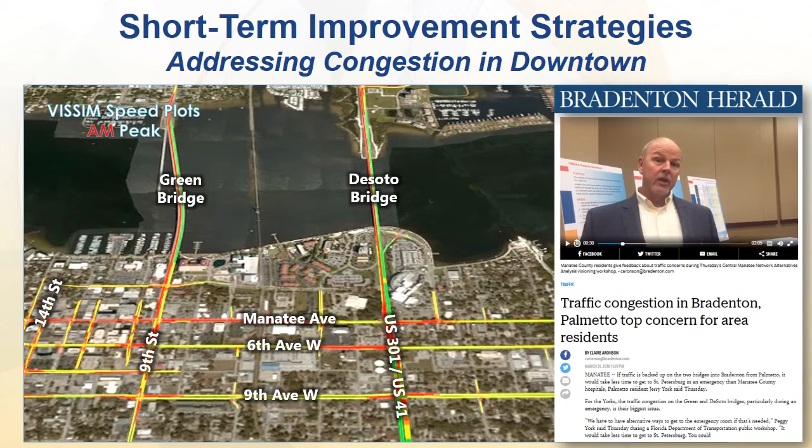This is a concept that significantly improves traffic flow during the busiest times of the day. It involves changes to traffic signal operations, restriping of existing pavement, and a few other minor modifications that fit within the existing roadway footprint.

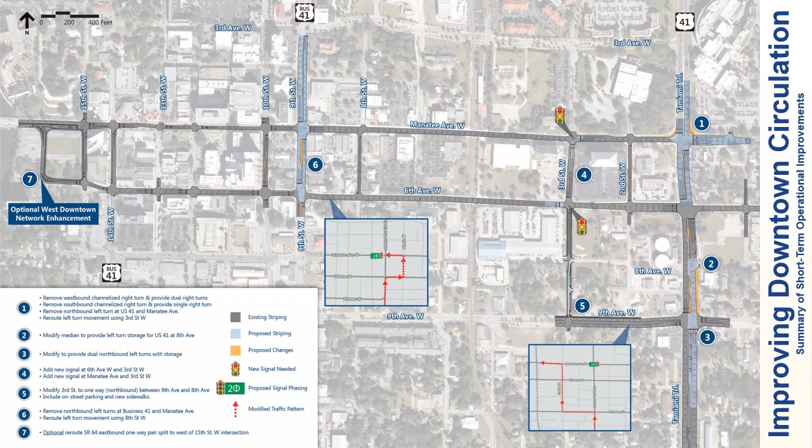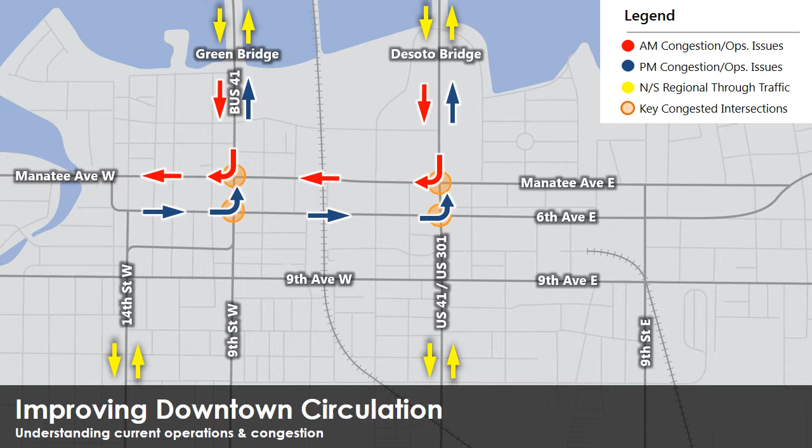The focus is on prioritizing key travel patterns during the morning and afternoon rush hours and looking for opportunities to provide relief at the most congested intersections.

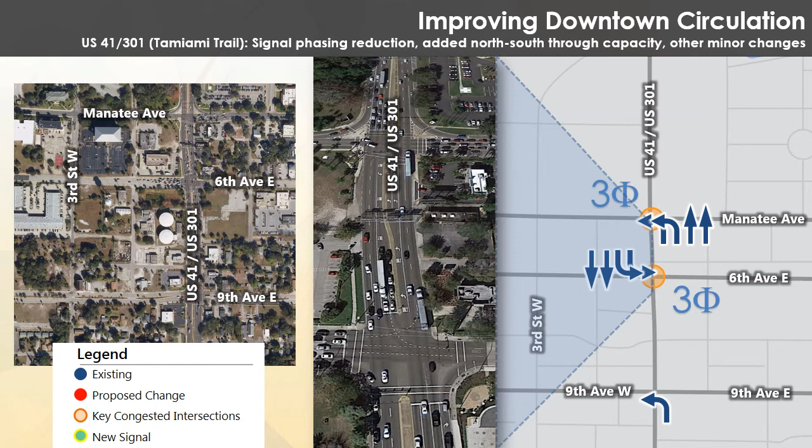Along First Street, which carries the heaviest volume of traffic, the intersections with Manatee Avenue and 6th Avenue provide an opportunity to increase the flow of through traffic. This is done by restriping the existing left turn lanes to create one additional through lane in each direction.

Northbound left turns from First Street onto Manatee Avenue are relocated to 9th Avenue, where they will use 3rd Street to proceed north to Manatee Avenue. These changes allow the traffic signals to serve many more vehicles within the same space the roadways occupy today.

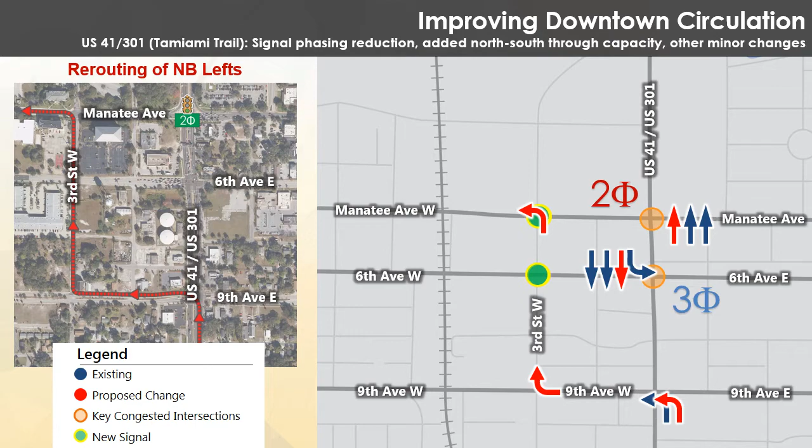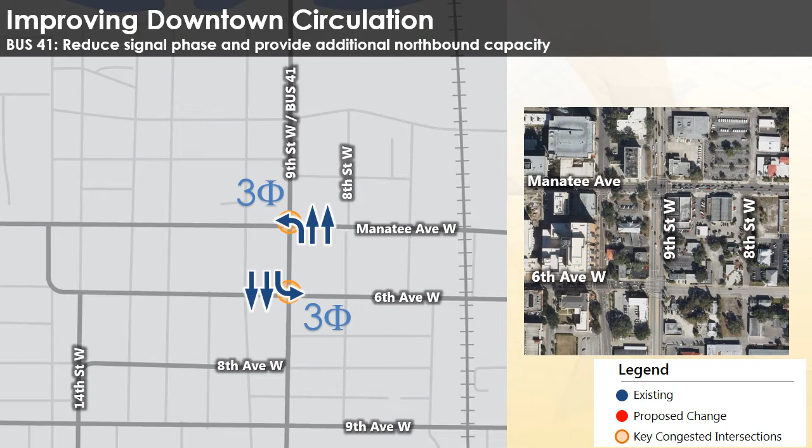A similar treatment is recommended for 9th Street. So the traffic signals can work more efficiently, the northbound left onto Manatee Avenue is shifted one block east to 8th Street. This provides 9th Street more green time to accommodate the heavy left turn traffic from 6th Avenue that currently backs up between Manatee and 6th.

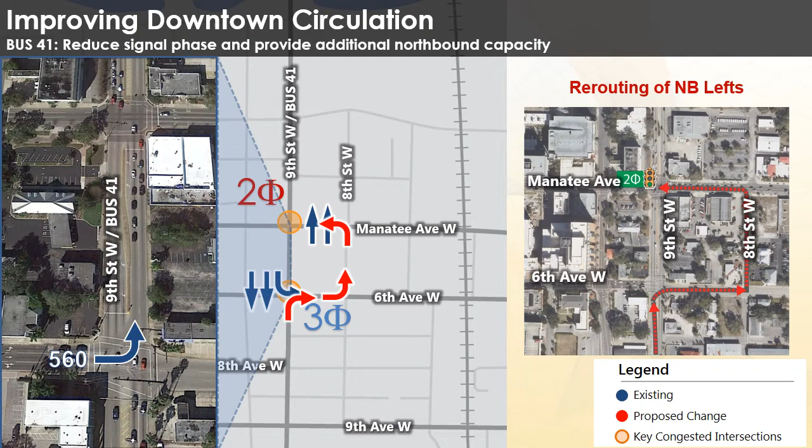A robust transportation network provides safe accommodations for all users, pedestrians, cyclists, drivers, and transit riders. Sometimes users are in shared space, and sometimes they need to be separated for safety, depending on how many cars are on the road and how fast they are moving.

A complete streets approach to network planning involves understanding the purpose of the street and addressing the abutting land uses. Elements incorporated into the cross-section influence the character of the facility, which in turn influences how people behave on the street. Identifying opportunities to enhance the network to better support people traveling through the community safely, conveniently, and comfortably is central to the development of a successful plan.

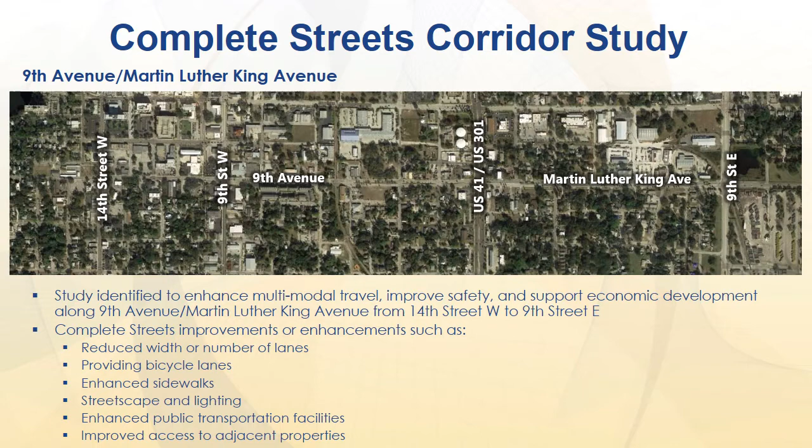An example of a complete streets project recommendation is the 9th Avenue, or Martin Luther King Avenue, Complete Streets Corridor Study. The purpose of the study is to identify complete streets improvements or enhancements that can be implemented along 9th Avenue, Martin Luther King Avenue, between 14th Street West and 9th Street East, such as reduced width or number of travel lanes, providing bicycle lanes, enhanced sidewalks, streetscape and lighting, enhanced public transportation facilities, and improved access to adjacent properties.

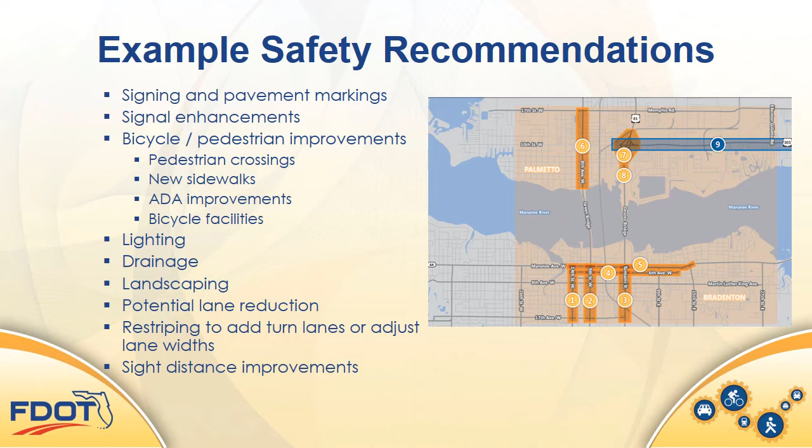Planning for safety is paramount. CMNAA has conducted roadway safety audits for 9 corridors that have identified safety countermeasures to reduce crashes. These improvements include traffic signal modifications, lighting, sidewalks, and bicycle enhancements, among others.

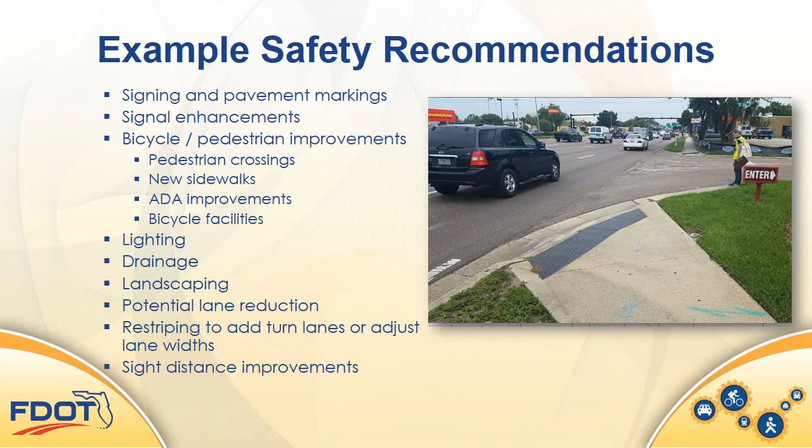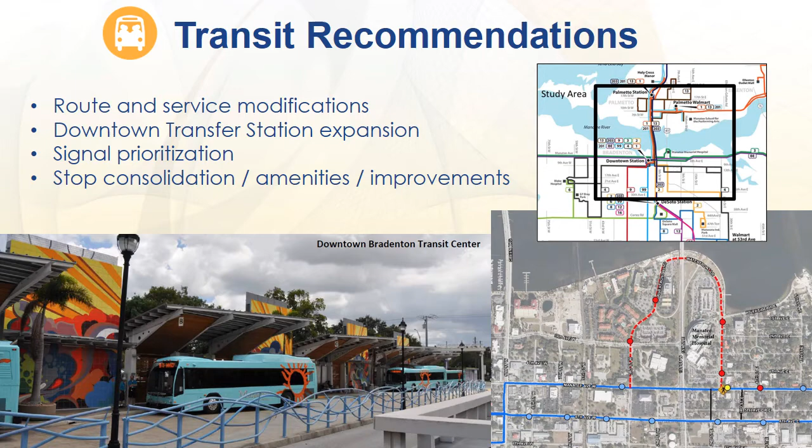Transit is another mode considered by the study. The quality of transit service is measured in frequency and reliability. Potential improvement strategies include route and service modifications, downtown transfer station expansion alternatives, signal prioritization, and bus stop improvements.

Our assessment of the pedestrian and bicycle network focuses on continuity between facilities that consider the volume and speed of traffic. Recommendations to improve pedestrian access include closing sidewalk gaps and providing more marked crossings.

For cyclists, the assessment looks at the mix of bicycle and vehicular traffic. Recommendations include buffered bike lanes where space allows, bike boulevards away from heavy traffic on alternate routes, and specially marked lanes on neighborhood streets or constrained corridors where bikes and cars share the roadway.

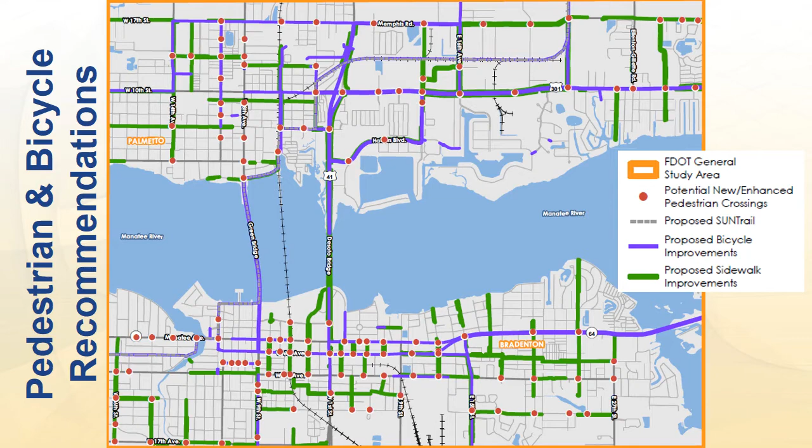As part of the Governor's initiative to develop a statewide system of interconnected recreational trails, the Florida Shared Use Non-Motorized Trail Network was established in 2014. The SUNTrail program provides state funding to develop new trail alignments, leveraging a series of existing trail networks throughout Florida.

Within the CMNAA study area, the Willow to Ellenton Greenway Trail is planned along the route shown here. This facility will provide regional connectivity between the Tampa Bay region and points south along Florida's west coast.

The CMNAA study has also identified an opportunity to enhance trails connectivity within the city of Palmetto. FDOT is partnering with the city and other local agencies to provide additional trail connections between Lincoln Community Park and the new Lincoln Memorial Academy Charter School.

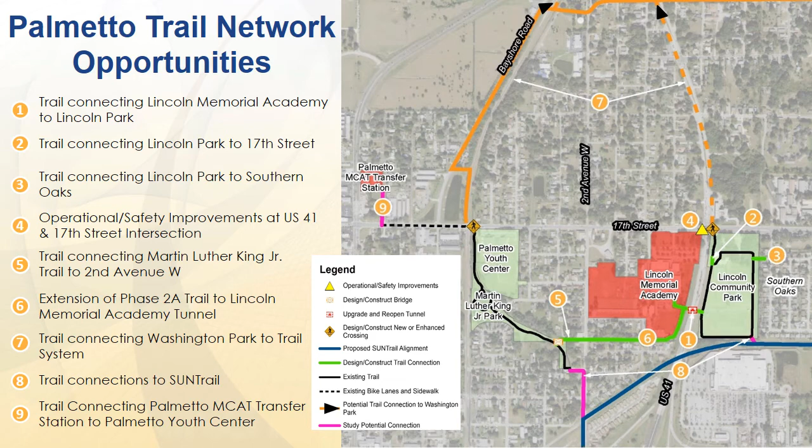This will tie into the planned SUNTrail alignment and provide additional connectivity to the existing Martin Luther King Trail. Opportunities to extend a trail connection to Washington Park as part of the near-term planned improvements by Manatee County are also being considered as part of this collaboration.